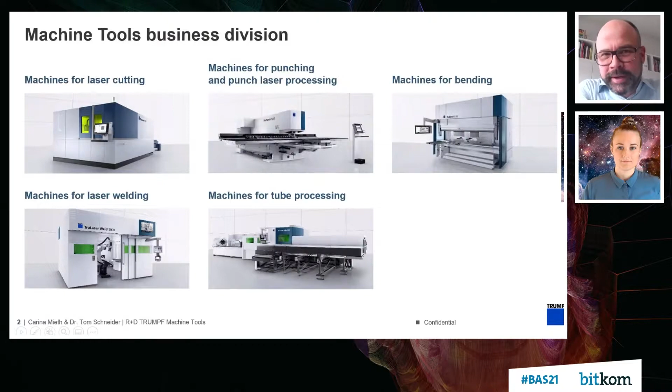Yes, thank you for the introduction. We would like to give you some insights on a very specific industry segment, and as a first starting point, some words about TRUMPF as one of the leading technology providers for sheet metal producing machines. So we have the laser cutting machines, punching, and including laser as a combination machine. We are developing our own bending and also the welding, and in a special case, specific machines for the tube processing to cut directly into tubes.

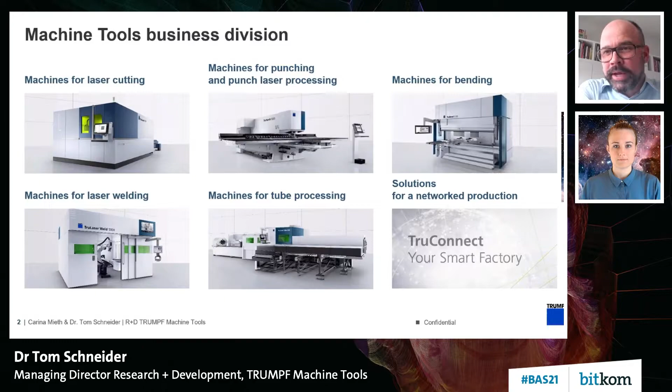And all of these are connected for our customers in dedicated smart factories where we would like to support them directly from the start of the design until processing on shop floor, including logistics. And this we call TruConnect, where we bring together hardware, software, and services. And today with Carina, who's one of the experts in AI on our team, we would like to give you the beautiful overview of what is done in sheet metal.

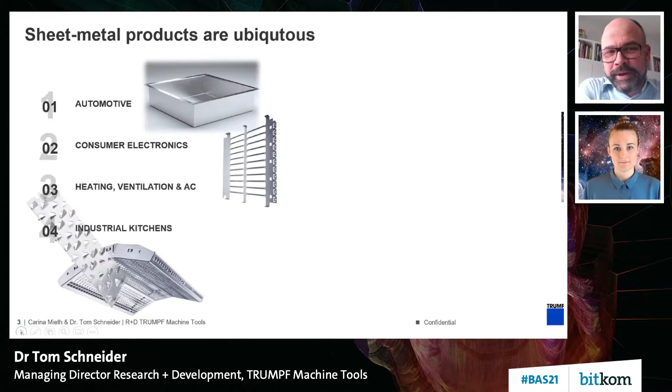And therefore, we thought it's good to start with an overview of the end product, which we think is what we all have to drive together with applications based on AI. So it's a very large overview of all the industries where sheet metal is taking its role as a kind of supporting element for design. So from automotive for e-mobility in the battery box, over consumer electronics, ventilation and heating, the industrial kitchens where we get our lunch from have a lot of sheet metal,

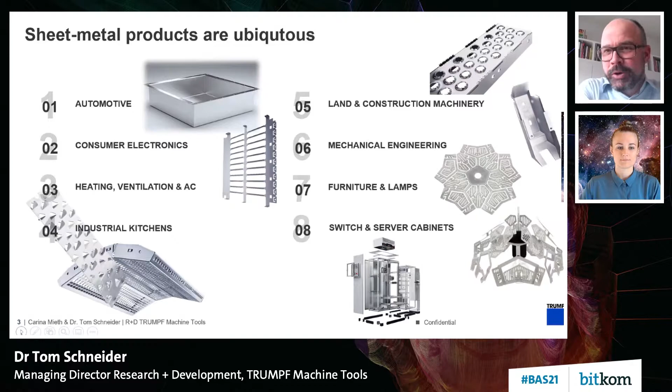but also heavy metal industry in construction and mechanical engineering, up to consumer parts in furniture and lamps, and whatever is driven by AI needs switches and server cabinets, and these are also housed within sheet metal. So the industry is big, and the process is always the same. So today we would like to take you into our process world and give you a presentation where AI supports our customers by driving their product excellence.

And we have three areas we would like to talk about. It's machine and automation, it's assistance systems, and at the end, connecting everything together in software and logistics solutions. And for the first detailed insight, I would like to hand over to Carina, because everything begins with the design, and it's the first step in for AI.

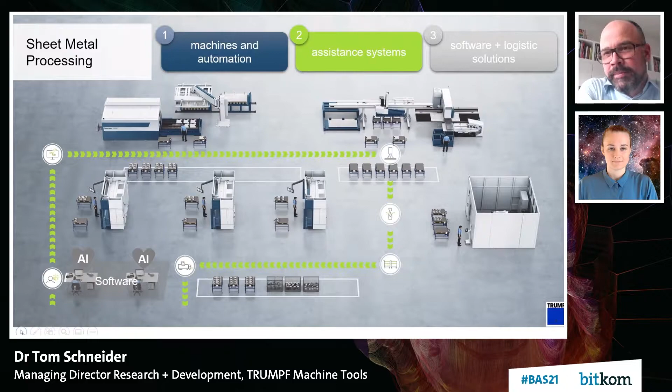Thanks. So I will start with the example of Optimate. Optimate is an AI solution that identifies design errors and cost-intensive steps. For example, we can identify if the minimum flange length is undercut in a sheet metal design, and this can be shown to the construction engineer so that we adjust this length to a suitable length that can be produced on a bending machine.

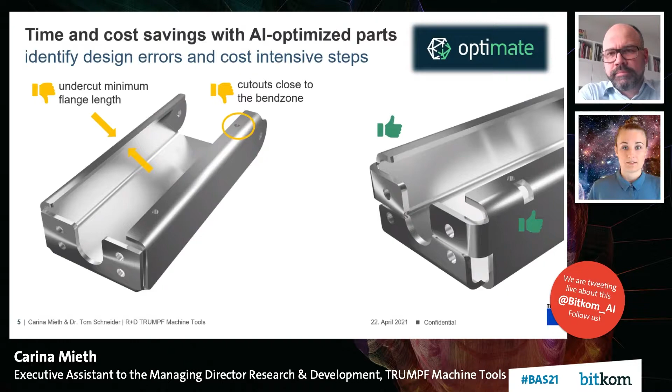Another example is cutouts, which can occur close to the bend zone, and this can lead to deformations on the contour. For this, we can include relief slots so that this can be produced reliably and without deformations. And the third thing is to avoid cost-intensive steps like the welding process. With an intelligent sheet metal design, we can replace this welding process with two bending steps, shown on the right-hand side. So this right part is optimized with Optimate and is therefore cheaper and can be produced more reliably. So that's our first AI use case.

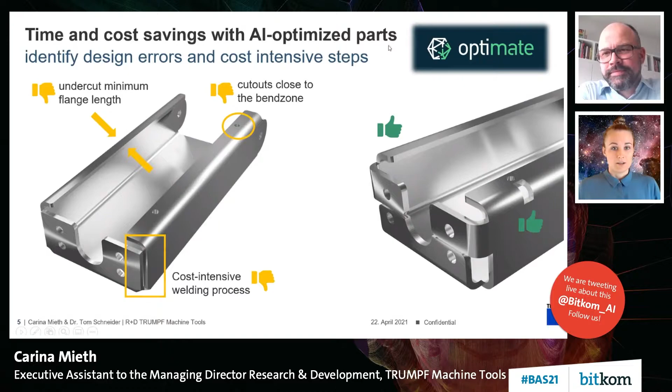And after construction and design, we go back to our process chain. So Tom, what's next? So after design and gathering the data, it has to be produced. And 80% of our customers are small and medium family businesses having 4 to 8 machines. And cutting is always the first step. So after we have designed the part and optimized it by cost and processing, we hand it over to our cutting machines. And for the very small businesses, we have in the last years developed an AI-based tool which supports our customers in the first process step.

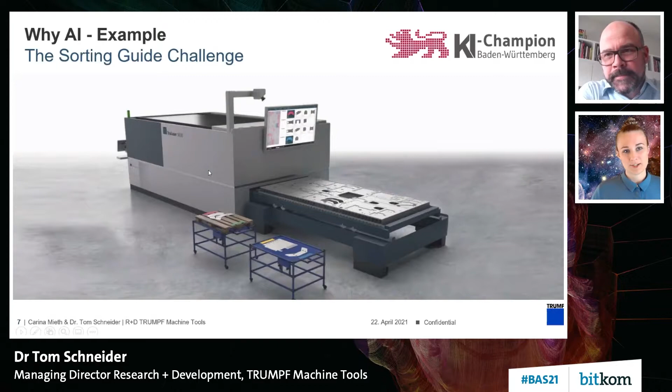And that will be highlighted by Carina, because it's also something where the technology of cutting the part meets AI in preparing the next process step. Yes, I will present to you the sorting guide and the challenge that we have here.

So with a laser flatbed cutting machine, we cut sheet metal parts from a huge sheet. And to use this sheet very efficiently, there are a lot of orders that are nested onto this sheet. And that's a huge complexity that the worker has to tackle in his daily work.

With this sorting guide assistance system, the camera detects a part removal and logs this automatically to the system. It also assists the worker by showing him different colored parts. By this, the worker can easily sort the cut parts to the next process step or according to an order set. This system was recently awarded the AI Championship from the federal state of Baden-Württemberg.

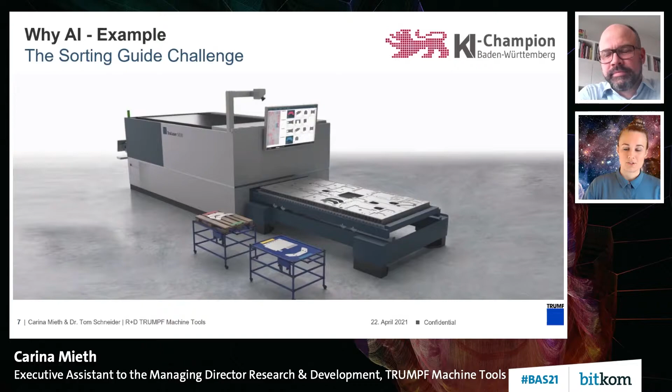In the next slide, I will show you why we needed AI for this. This is basically due to the fact that we have a very versatile working area there. So it's a huge space. There are a lot of different conditions that can occur.

For example, we have different materials that can reflect the sun, or the sun is shining through windows on the working area. We have a lot of different part geometries, or the person interacts with the working area. And all these things are difficult for a classic algorithm to cope with.

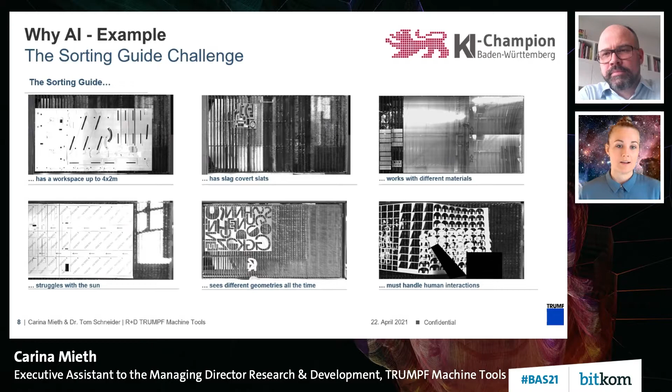That's why we solve this challenge with an AI solution here. I will show you this using the example of the sheet tracking, where we started with a classical computer vision algorithm and just started to implement it and collected data from our test customers and did the normal data labeling.

And then we could start training a neural network to do this detection more reliably, due to the fact that it was very hard to parameterize these classic machine vision algorithms so that they work reliably in all these different conditions.

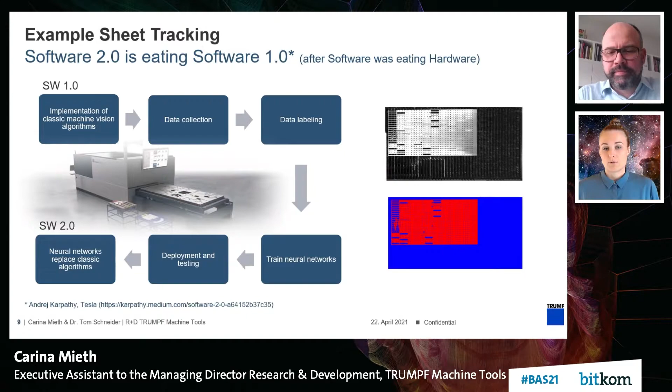We already showed in this example that our neural network is really robust and more reliable to detect the sheet position. This is shown also here in this little example. You see the machine area and also the sheet. So for a human, it's very obvious where the sheet is. And now this AI system can reliably detect all the parts that belong to the sheet, which are metal parts, for example, and also what is just apart from the machine.

So Tom. And that's the hand sorting, and I think we have to speed up in the application of AI, but the next thing is speeding up the process chain at our customers and coming to more autonomous driving. Maybe we give the audience a short insight of how AI in autonomous producing machines is currently supporting our customers.

Of course. I will introduce the example of our fully automated TruLaser Center system. This system has an automation unit which removes the sheet metal from the residual sheet. Here you can see a not so successful try of the machine where the part gets hooked in the residual sheet.

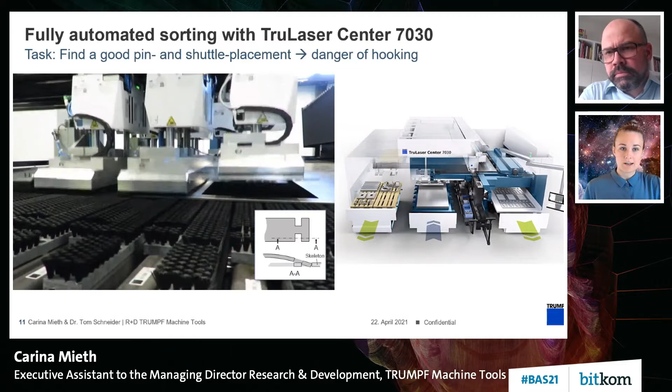This is due to a complex problem, namely the precise position of these shuttles together with some pins that come from below. This is an optimization problem, which is also shown here a little bit more schematically, because we have to define in advance where these pins should be placed in a very complex geometry.

If you put pins only on one side, you know that parts can tilt or something. So by each part that is removed, we always save the combination of pin and shuttle placements, and the machine can detect whether the part removal was successful at first, second, third try, and so on. And if it fails the first time, the machine is so intelligent that it can adapt the positions of the shuttles and the pins so that it tries again in another composition.

This is saved and the basis for our learning algorithms in this machine. And so we create a very robust automation unit that is the first step into fully autonomous manufacturing.

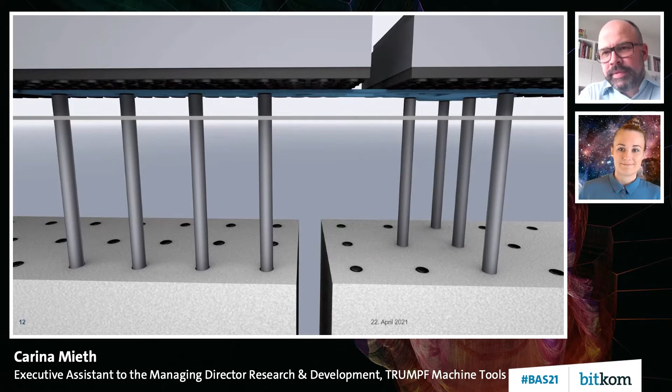So now we talked dedicated about the manual process assistance systems and autonomous driving. And I think summing it up into a process chain, we see that the logistics is, after our bending and welding part, the key driver of making our customers successful. And also there we have an application support by AI, which is, I think, worth sharing today.

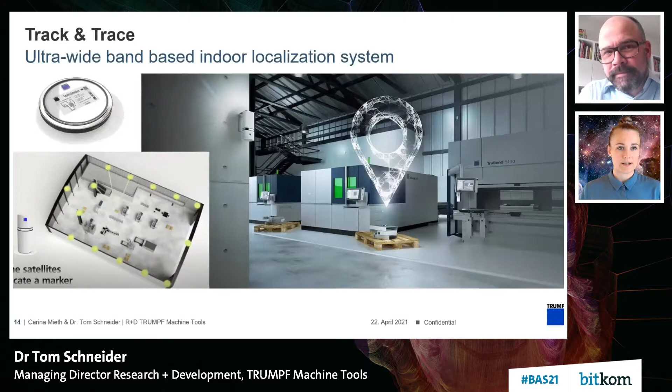Okay, I'll dive into that.

So we introduced some years ago already the track and trace system, which is an ultra wideband based indoor localization system. It works similar to the known GPS, the global positioning system, where you have satellites attached to the walls of the production hall.

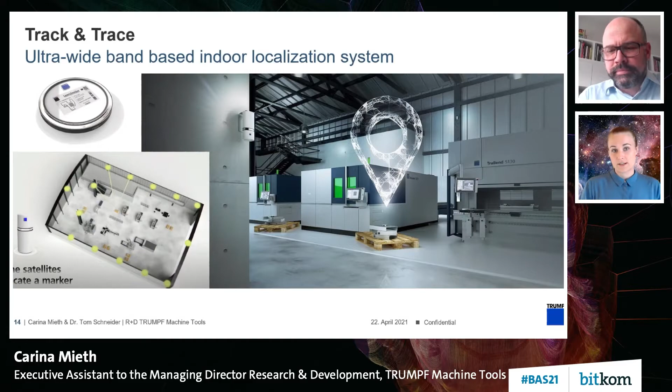And you have mobile devices attached to the orders at the beginning of the production flow. With radio signals, you can triangulate positions, and thereby digitize the whole material flows in a production scenario. This is a quite interesting use case for big data analysis, because we can use each position from each order over time to do insightful analysis.

And this one, which I bring to you now, is a data quality analysis where we compare the ERP data with our automatically logged position data.

In this yellow rectangle box, we have the bending area of a customer site. We looked into the ERP data, whether an order was clocked into the bending process or not.

To explain this a little, it's still a very manual process. The worker starts his job by walking to a terminal and clocks this order, and after he finishes processing, he does this again. So it relies on the worker that he always really does this at the exact time.

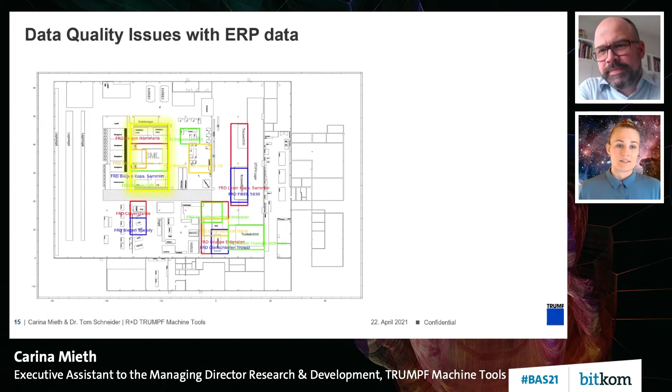And if we compare this with the traces we get from the indoor localization system, we see that there is a huge deviation. For this specific customer, 83% of all activities were not in the bending area, but somewhere else.

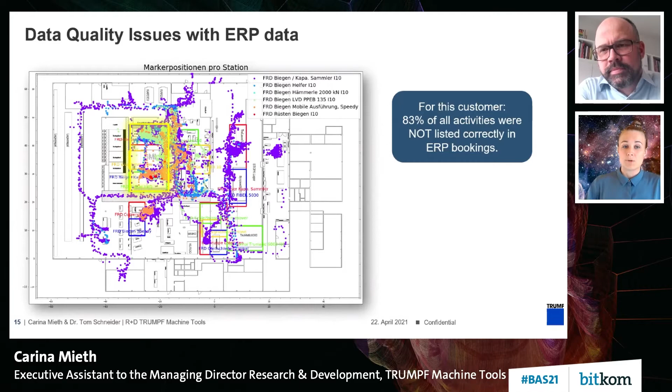So we see that there is a huge deviation between what is logged in the ERP system manually versus what we can achieve with an indoor localization system, where each step is digitized automatically.

Now to finalize our presentation of the use of industrial AI, I think it's giving ourselves the position that we would like to optimize for our customers the full process chain right before they are building up the factory, where all the information we have collected over the different machines and assistance systems come together.

And this is maybe, for the last 5 minutes, a good outlook to see where all these come together.

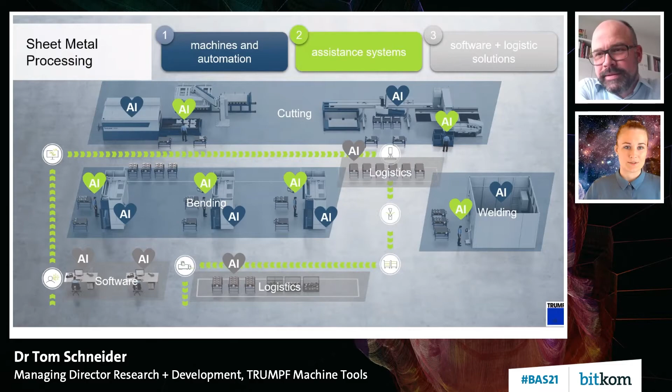Of course. So let's start this section with a little question at the beginning: Chess, Go, and sheet metal production - what do they have in common?

Let me explain this a little further. We have a really complex optimization problem, two problems which are closely interwoven. On the one hand, we have a packing problem where parts are nested efficiently on a sheet metal to minimize the waste that occurs in the cutting process.

And on the other hand, we have a machine assignment problem where we want to increase and maximize the utilization of the machines. Normally we have an input stream of orders where we have different parts with due dates and values, so this is similar to, or just a basic job scheduling problem.

But then if we nest it on the sheet, we define when it's available for the next process steps. And if we then see in production that a machine has low utilization, we have to go back and adapt the cutting. And then you can see it's just a vicious circle - if you optimize only on one side, you get a bad result on the other hand.

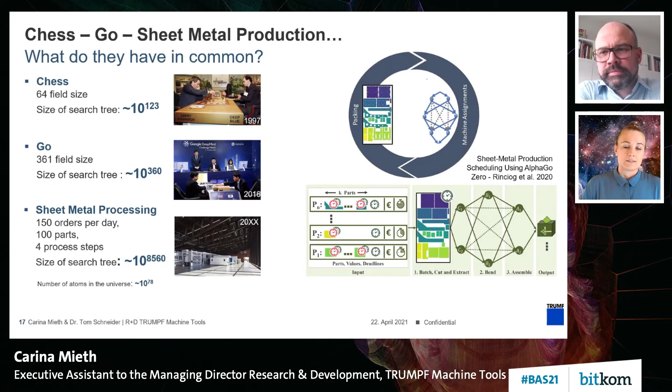So that's a quite interesting thing here. With reinforcement learning, you always have to have a precise model of reality, which you can use to evaluate your goal function. And this model is a digital twin for us.

So digital twins and AI are a very perfect combination, and I want to show you why. Our simulation that we use in our digital twins is an agent-based and discrete event simulation. This modeling paradigm is very nice to do AI stuff with, because this agent paradigm is very similar to learning and training agents with a reinforcement learning policy. So that's what I showed you before already.

And there are other important pros. If you want to do data farming, for example, to abstract a complex simulation model, you can use this model, generate input and output behavior, and train models to abstract this behavior with a better response time. You can also play out the model to generate traces for rare cases. And the last thing is that you can also use these models and digital twins as test beds for your trained networks. As you know, simulations are a risk-free environment, so if your AI does something weird, it only crashes the simulation and not the real production scenario.

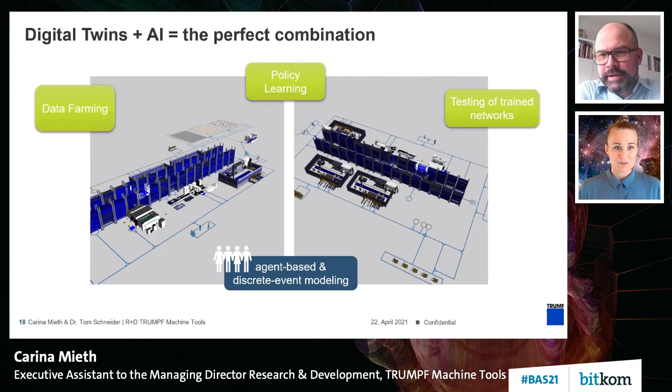So that's it. Tom, please conclude why we have a sweet spot here with our industrial AI. So it's like we tried to convince you that it's a very nice setup to use AI in a real industrial environment, and we took over as a final remark the statement from Alan Kay, that people who are really serious about software should make their own hardware. I think we would like to transfer it a little bit: people who are really serious about industry should make their own machines.